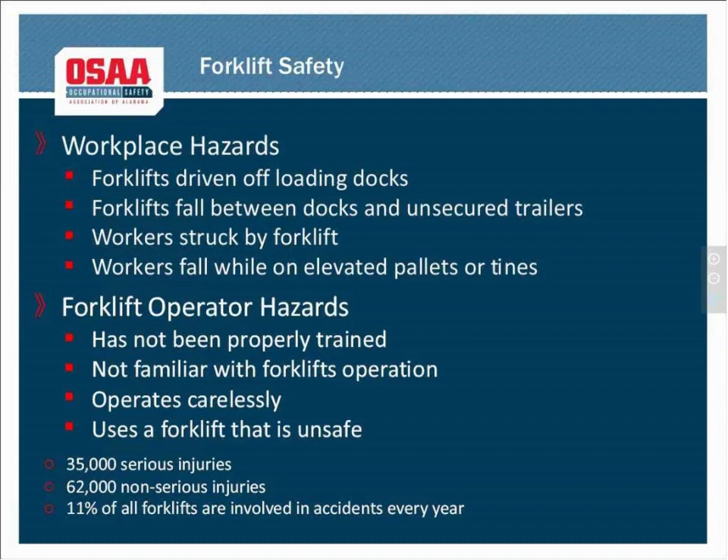Approximately 35,000 serious injuries and 62,000 non-serious injuries involving forklifts occur in the United States every year. OSHA estimates 11% of all forklifts are involved in accidents every year. Ensure a safe ride by knowing what to do. Conduct a pre-check, know your equipment, and know your route of travel and what hazards you may encounter along the way.

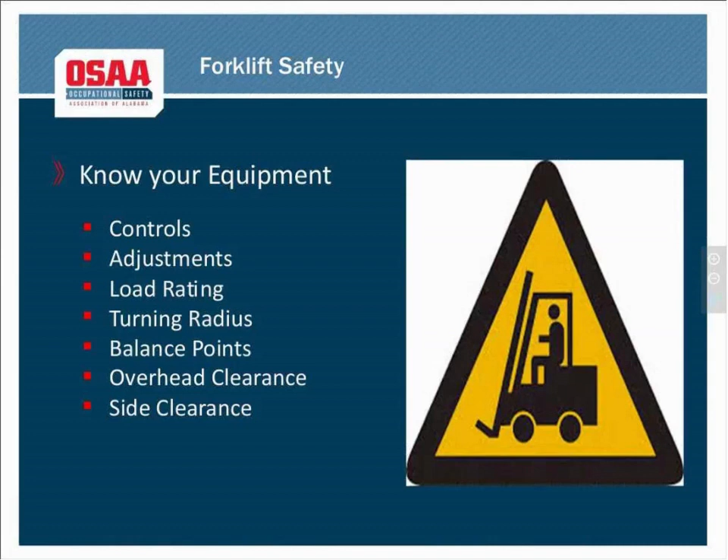Also, we're going to talk a little bit in some later slides on proper overhead clearance as well as side-to-side clearance when operating the forklift. One of the things that we need to run through are pre-use safety checks. This is an OSHA requirement.

And for more information on OSHA requirements as it relates to powered industrial trucks, and the majority of the things that you're going to see us talk about today in this webinar, you can go to OSHA's website, and in their search bar, which is powered by Google, type in CFR 1910.178, which is OSHA's powered industrial truck standard, or you can just type in powered industrial truck, and OSHA is going to give you a plethora of information.

So again, back to the pre-use safety checks. Before each use, before each shift, and before the forklift is used initially during the shift, you want to go through a list of safety checks. You want to make sure that all the controls are working properly. Look around the forklift. Make sure there's no fluid leaks. Make sure there's no damaged or defective parts on the forklift. Make sure all the safety features are working properly on the forklift.

The horn, the backup alarm, lights. Make sure the brakes are working properly. Check your seat belt. Make sure that it's not damaged or defective in any way. Make sure that there's a fire extinguisher located somewhere on the forklift. Forklifts are required to have a fire extinguisher on them. Make sure that fire extinguisher is properly charged. That fire extinguisher that's located on your forklift should also be rolled into your normal fire extinguisher monthly inspections as well.

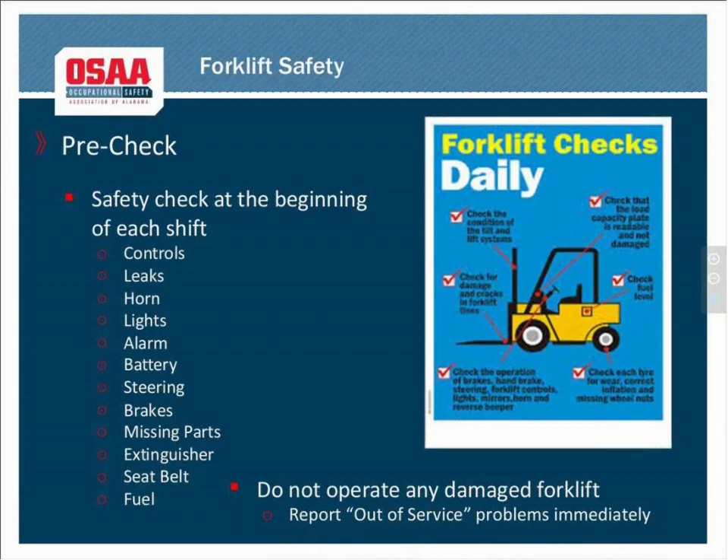If you find any damages or defects, anything that may deem that forklift unsafe, place that lift out of service immediately. Tag it as such. Tag it that it's out of service and it's not to be used for any reasons. And then contact whoever your service provider is for your forklift so that they can get a technician out to you to either repair the forklift or replace it and not use that defective lift.

Just some general safety rules that we're going to talk about when we're operating a forklift. Number one is make sure that you use your seatbelt. Wear your seatbelt at all times when operating a forklift. This is also an OSHA violation to operate a forklift without wearing the safety restraint.

Also, just in case there's any confusion, if you have an older forklift and it is not outfitted with a seatbelt from the manufacturer, and this would have to be a pretty old lift, OSHA's stance on that is if your forklift has a seatbelt, you're required to use it. If your forklift does not have a seatbelt, then, of course, you can't be required to use something that's not there. But you have to do a little research, make sure the manufacturer does not make a kit to go back and retrofit that old forklift with a seatbelt. Because if that is the case, you're required to purchase that retro kit and go back and outfit that forklift with a seatbelt.

Also, you want to make sure that you operate the forklift only in designated areas where it's approved to be operated. Try to stay clear of areas that have high pedestrian traffic if that's possible. You also want to make sure that you're operating the forklift in an area where the ventilation is adequate. Do not exceed any floor load ratings. Check and make sure that you have an understanding of what the working load limits are on the surfaces that you're going to be working.

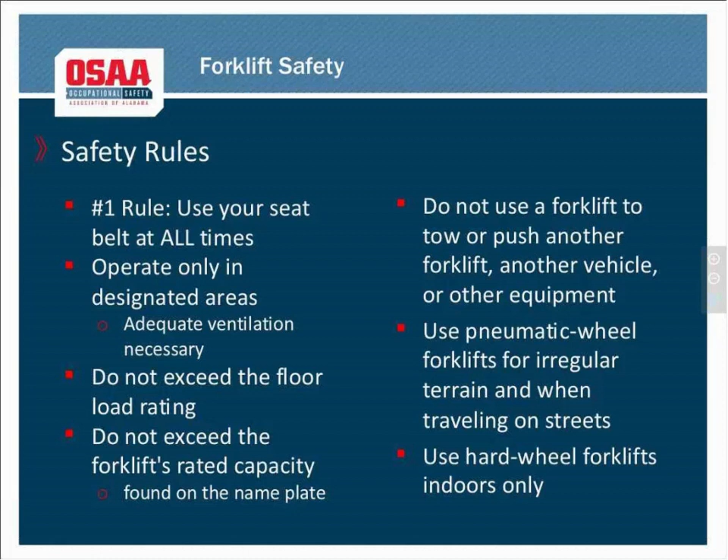Before traveling with a load, you want to make sure that you tilt the mast back. Make sure that you maintain the forks when traveling about 4 to 6 inches off of the floor. This is going to be where the load is going to be the most stable and easiest to maneuver with.

Before entering a trailer, you want to make sure that the dock boards are properly attached. You want to get off the forklift, go onto the trailer, check the flooring of the trailer. Make sure that there's no rotting areas or other defective areas in the trailer floor that could cause you issues when traveling on and off the trailer. Ensure that the trailer wheels are chocked.

This is a must. With the weight of that forklift going on and off the trailer, as you travel onto the trailer and apply your brakes, if those trailer tires are not chocked and that trailer is not secured, it's going to slide forward to some degree every time you apply the brakes on that forklift and that weight shifts forward.

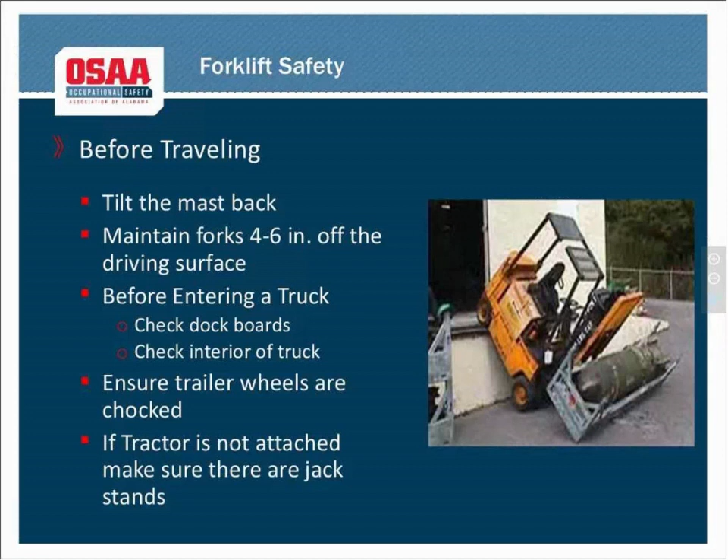Also, if it's not attached to a tractor, the landing gear on the trailer is not sufficient for supporting the weight of that forklift traveling on and off. You want to make sure that some type of jack stand is available to help support some of that weight and take some of the stress off of the landing gear of the trailer.

Also, when traveling with the load, make sure that you adhere to all speed requirements. The recognized indoor speed limit is 5 miles an hour. However, in some locations, whatever company policy dictates, the posted speed limit may be less. I've been in areas where there's a posted speed limit of 3 miles an hour. So you've just got to have an understanding of whatever the policy of that facility is and adhere to that. In outdoor settings, typically 15 miles an hour is the recognized outdoor speed limit on a lift.

However, if posted lower, make sure that you adhere to that as well. Also, make sure you yield to pedestrians. Don't take for granted that they see you or that they know what you're doing or where you're going on that lift. That person may be in kind of what we call disconnect mode. They may be walking and just oblivious to the things that are going on around them. So make sure that you do things to make your presence known, yield to them.

When going in and out of doorways or aisleways, any type of intersection, make sure you slow down, sound your horn, and watch for pedestrians. If you're in an area where there are traffic signals, especially if you're using a forklift outdoors, make sure that you obey any traffic signals.

Also keep in mind, forklifts are not passenger-carrying vehicles. A forklift is designed for the operator and the operator only. In some instances on larger lifts, there may be a factory-installed seat for a spotter or something like that. That would be the only instance where you would have another person on that forklift.

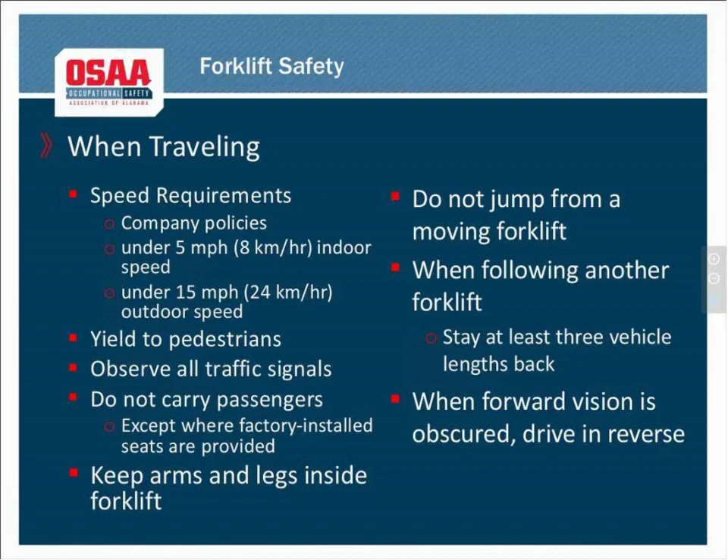One last note to mention on traveling. When traveling, if the load that you're carrying obstructs your view to the front, turn around, drive in reverse with the load trailing so that you have a proper field of vision for travel.

Also, make sure that you have adequate clearance under structures, maybe elevated walkways or overhead racks. Make sure you have proper clearance when you're going to be raising those forks. Make sure you have proper side-to-side clearance in between structures when entering doorways.

If you're using the forklift outside, be extra cautious of the placement of overhead power lines, especially when you're in areas where you're going to be raising the mast. You want to make sure that you have a minimum of 10 feet of separation, but if the conditions allow, try to put as much distance between you and any overhead power lines or power sources as possible.

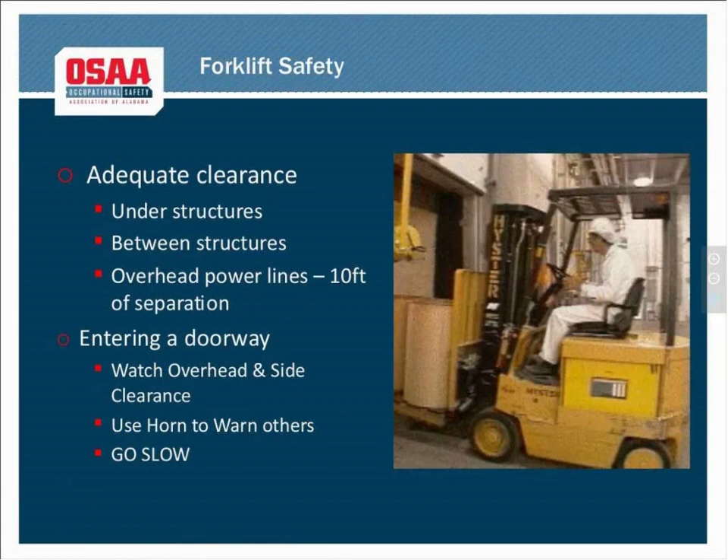When lifting or using the forklift for material handling, know the weight of the load, know the composition of the load, know where the balance points are. Make sure that you never attach any slings, cables, or chains to the forks to lift materials or objects from underneath them.

If for some reason you do use fork extensions, you have to keep in mind that those affect the stability of the lift and that the rated capacity is for the forklift as is. It does not take into account that you're using any attachments, such as those fork extensions. So that's something that you have to keep in mind if, for any reason, you do use those extensions.

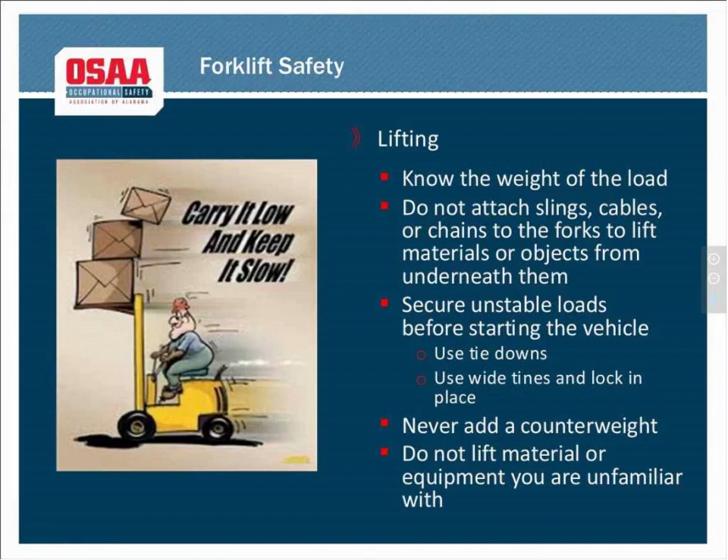When lifting unstable loads, make sure that they're properly secured before you lift or travel with them. Use tie downs or wide tines and lock in place. Never use counterweights when material handling. And don't lift anything or any piece of equipment that you're unfamiliar with. If you're unfamiliar with it, you don't have an understanding of the weight, you don't have an understanding of the stability of that load, and it could put you in a hazardous situation not having that knowledge.

When negotiating ramps or slopes on unlevel surfaces, some things to keep in mind when traveling. If the forklift is loaded, always ensure that the load is against the backrest, that the forks are underneath the load as safely as they can be without damaging the load, and drive forward up the ramp and back down the ramp. This is when the forklift is loaded. When the forklift is unloaded, drive forward down the ramp, drive backwards up the ramp. This is going to give you a better field of vision for traveling.

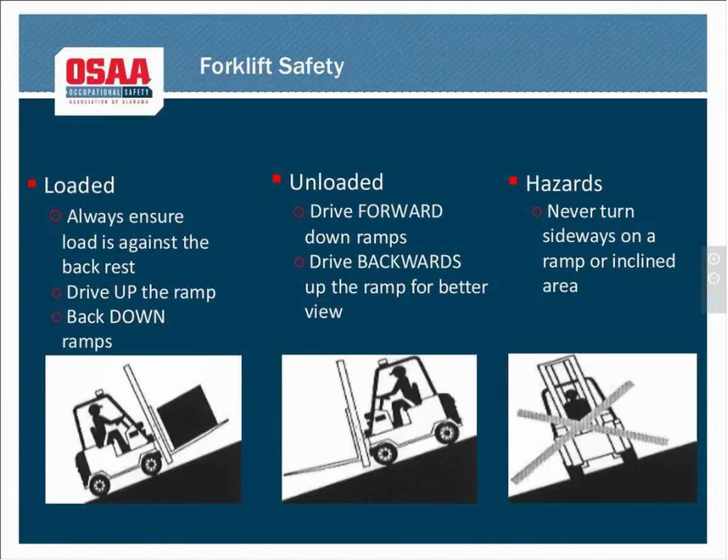Also, and this is very hazardous on these forklifts, because of their varying centers of gravity, never turn or navigate the forklift sideways on a ramp or any inclined or unlevel surface. This can cause a rollover hazard.

When you're going to park the forklift and leave it unattended, there's a couple of steps that you have to follow. Some of those include, when you're going to leave it unattended, you want to lower the forks, neutralize the controls, shut off the engine, and set the brake. Take those 4 steps when you're going to park the forklift and leave it unattended.

Also, make sure you park it in a location where it doesn't block exit routes. It doesn't block aisleways, fire escapes. It doesn't block fire extinguishers. Make sure it's in a location where it's not going to be in anybody's way. Make sure that the keys are removed from it.

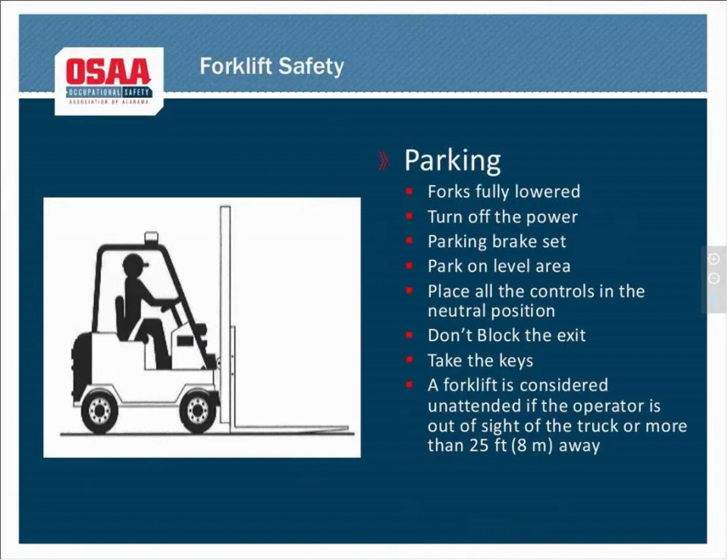And a forklift is considered unattended when it is out of the operator's line of sight or the operator is more than 25 feet away from the forklift. That's when a forklift is considered unattended.

A couple of things to note when we're either refueling or recharging the forklifts. If you're going to place fuel in a gasoline or a diesel-powered lift, or if you're changing the propane tank on a propane lift, make sure that all those things are done outdoors. That should never be done indoors. Also, especially when changing the propane tanks, make sure that you're using PPE such as gloves. This can prevent a frostbite hazard in the event of some type of accidental release of that propane.

Also, close the valve on the propane bottle when the engine is running. This is going to consume any gas that's left over in the line, any fuel left in the line. And then again, common sense should tell you don't be smoking when you're refueling the forklifts, no matter what type of forklift it is. Also, on these propane lifts, make sure that your bottle is secured before using the forklift.

For electric forklifts and the recharging stations, you want to make sure that they're charged in an area that's designated, it's posted as a charging area, and it's a well-ventilated area. These battery packs are extremely heavy, and most places that have these are going to have a device that assists you in changing these batteries out just due to the weight, which will take some undue stress off of your lower back.

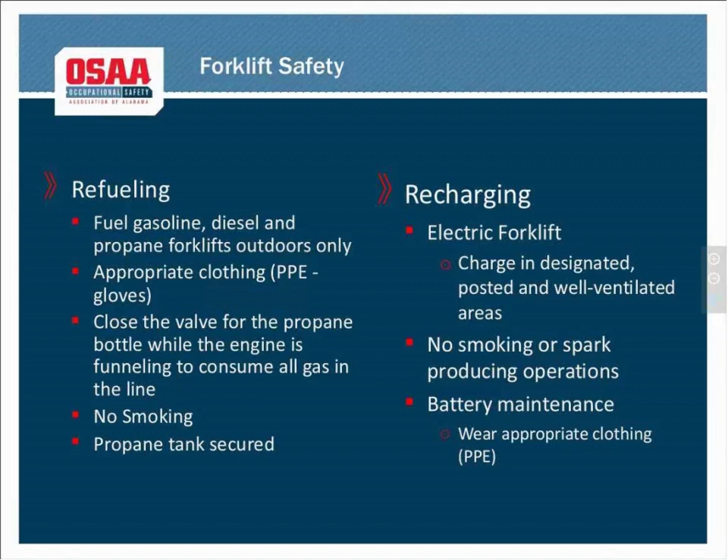And then talking about forklifts and using these in hazardous locations, we have non-hazardous and hazardous forklifts. These have minimum acceptable safeguards against fire hazards. Some of these types are Type D forklifts, which are diesel-powered lifts. Type E, or electrically powered forklifts. These have minimum acceptable standards against inherent fire and electrical shock hazards. Type G are gasoline-powered lifts. Type G/LP forklifts are either gasoline or liquefied petroleum. And then Type LP are just liquefied petroleum.

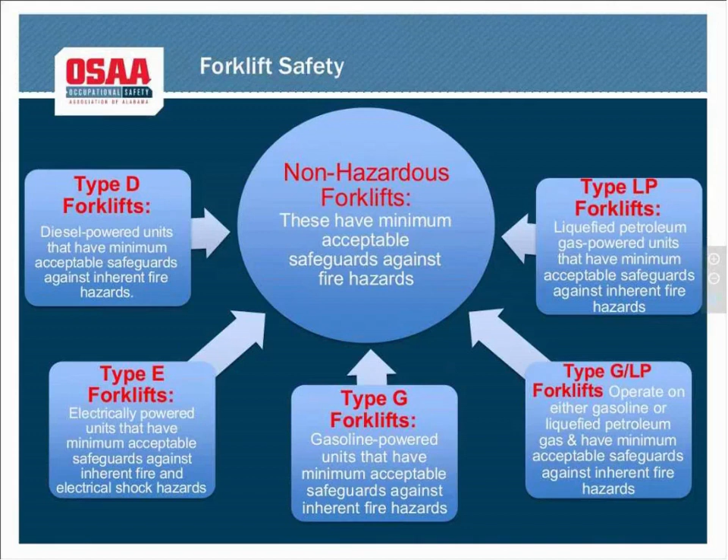And keep in mind, these are minimum acceptable safeguards against inherent fire hazards. So those are just the bare minimums. Anything that you do above and beyond that just provides extra protection to your employees.

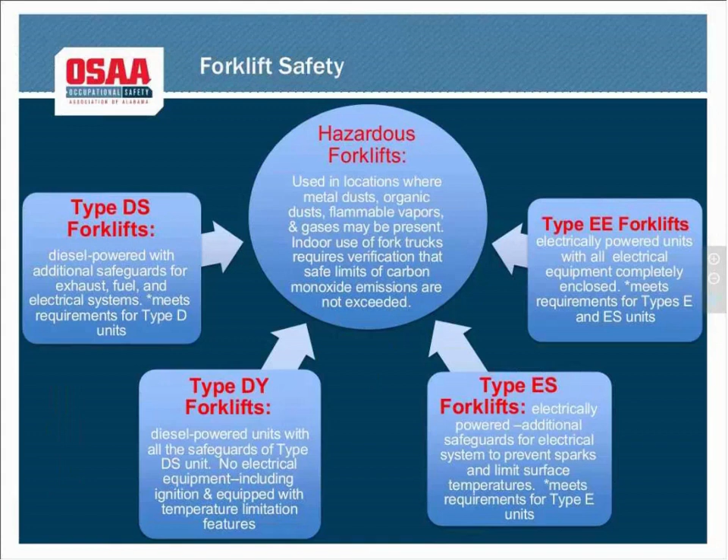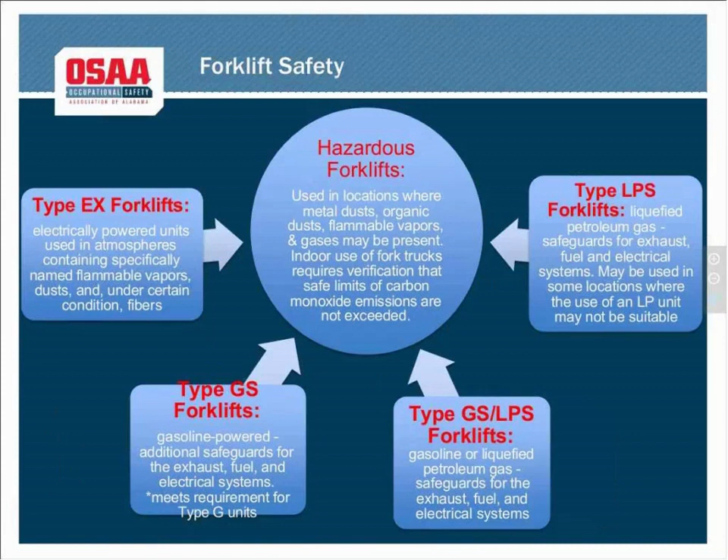Hazardous forklifts are used in locations where metal dust, organic dust such as peanut dust and other grain dust, flammable vapors and gases may be present. Indoor use of fork trucks requires verification that safe limits of carbon monoxide emissions are not exceeded. And then that's the same on this slide as well. You have the Type EX forklifts, Type GS, GS/LPS, and Type LPS forklifts. Again, for the non-hazardous types of forklifts, their use may not be acceptable in these areas.

Again, if you go back to 29 CFR 1910.178, which is OSHA's Powered Industrial Truck Standard, it spells out in great detail all the steps you need to go through to make sure that your employees are properly trained and properly evaluated in using powered industrial trucks. Your training program can go a couple different ways. You can have an in-house training program where you have a competent person who has been trained themselves, and they are able to train and evaluate your other employees on safe use of forklifts. This can be your in-house program.

It can be done through PowerPoint training. It can be done through a video. One thing you have to keep in mind, if you're going to show your employees a video for training, you cannot put them in a room, put the video on, and leave them. A competent person has to be available during the course of the video to answer any questions that those employees going through the training may have. You can also use an outside agency to administer your training. This can be done from your forklift supplier or any other third party, a safety consultant, anyone who can properly train your employees on forklift safety.

And then the certification is a 3-year certification. However, there are some instances where you will have to have some documented retraining and reevaluation before that 3-year period is up. If an employee is caught horseplaying or performing unsafe acts on the forklift, you should document some type of retraining or reevaluation. If they have an accident involving a forklift, the same goes for that. Immediately you should do some type of remedial training and reevaluation. And if you get a forklift that operates differently than the forklifts they've been trained on, you should also document some type of retraining and reevaluation.